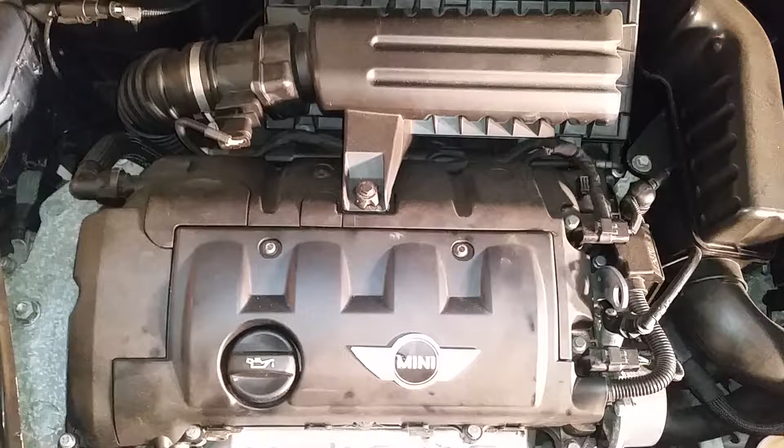Okay guys, I'm going to change the valve cover gasket. You watched my other video on when I was changing the spark plug. I actually found oil in the spark plug well, so that tells me I got a leaky valve cover gasket.

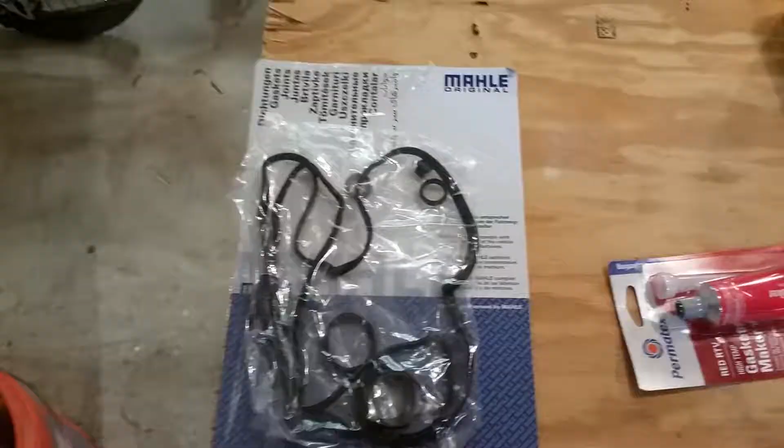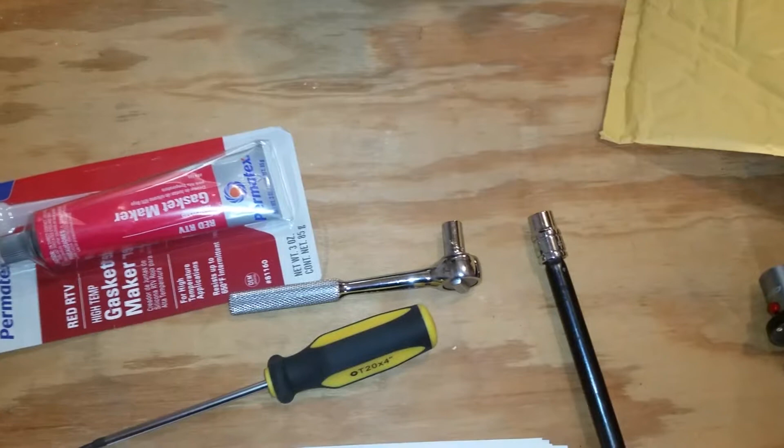So the tools I think I'm going to need, let me show you. I got a new valve cover gasket kit, it was a little over $20. I'm going to need some RTV, at least an 8mm socket and 10mm socket, a T20, and probably a few other things here and there - we'll see what we need.

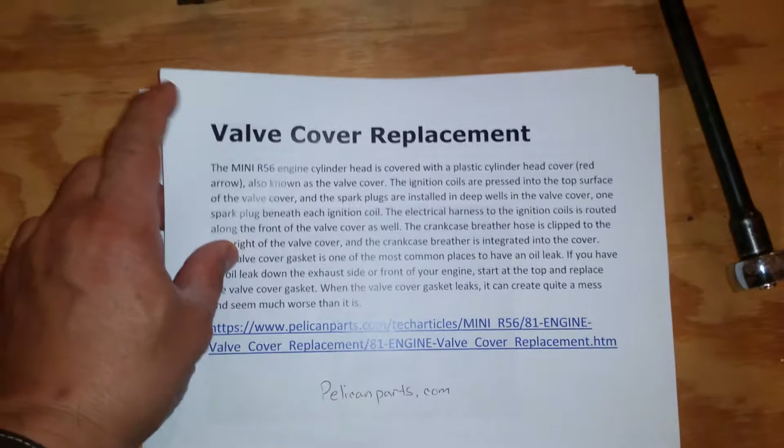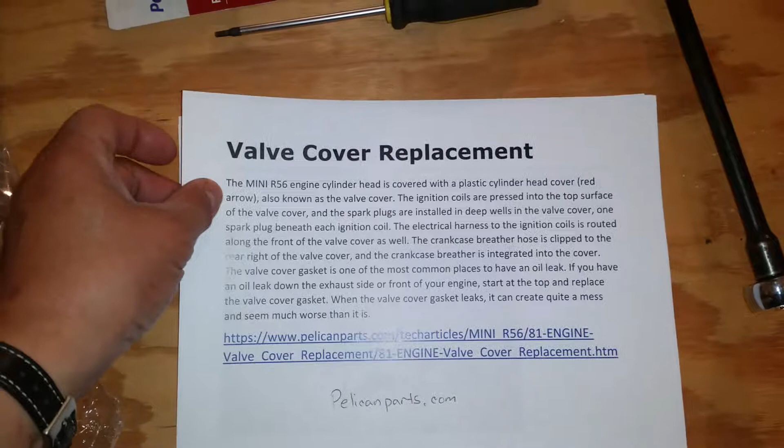I'm going to follow closely what I found online for Pelican Parts. Basically they had instructions on how to remove the valve cover off a Mini. I'm going to follow that, kind of, but I know theirs is a little bit different - some of the parts are a little different, so I'll point that out, but I'll try to follow through their steps basically.

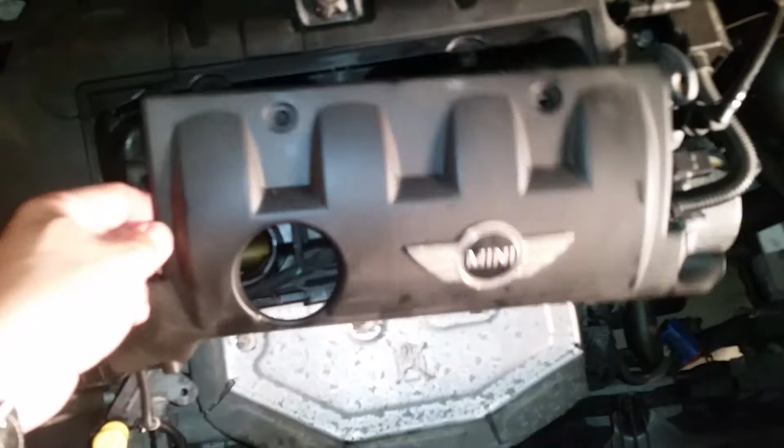So already I'm not following their instructions because mine's a little bit different. I went ahead and took the T20s out to take off the cover.

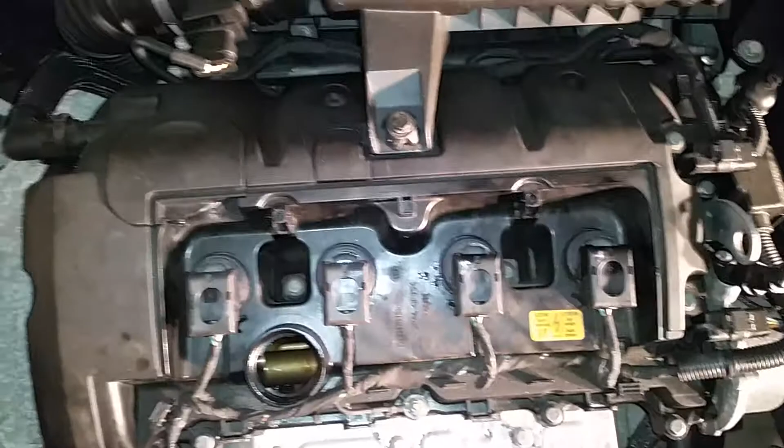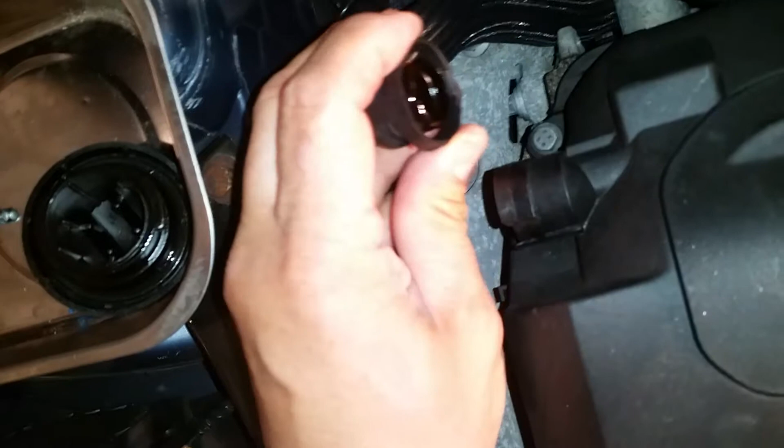So I think the next thing I'm supposed to do is squeeze this to slide off this breather hose. So basically to take off this breather hose, you just squeeze on both sides and then it pops right off.

Okay, most of the instructions are about getting this off, so we'll go ahead and take out this bolt first. Basically to be able to take this out, I've got to take this out. So I'm going to go ahead and loosen that bolt and disconnect it here.

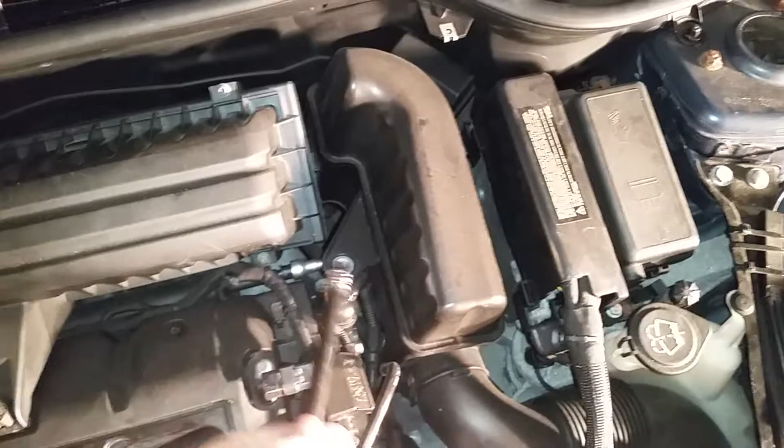So basically I pulled out this fresh air intake hose, and to disconnect it from this, you just push on this tab, which lifts it up and allows you to pull it out because of this little ridge right here.

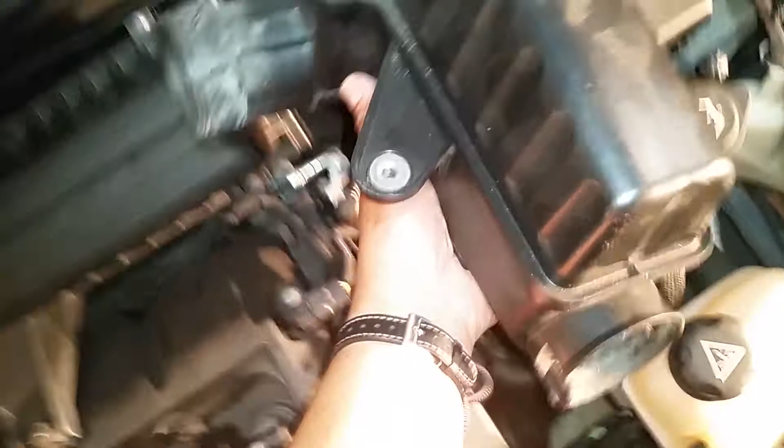So once that bolt was taken out and the fresh air hose was disconnected, this thing just pops right off really easily.

So took off this, I think it's a mass airflow sensor, and basically you push on this little tab that's on the bottom side. Once you push it and squeeze it, then it'll just pull right out.

So next I'm going to loosen this so I could disconnect it. I don't think you need to actually pull this off, because I'm going to try to work around it - you can see way down there, I think it's held in from that. So I think I'll still be able to get the valve cover off with it loose like that.

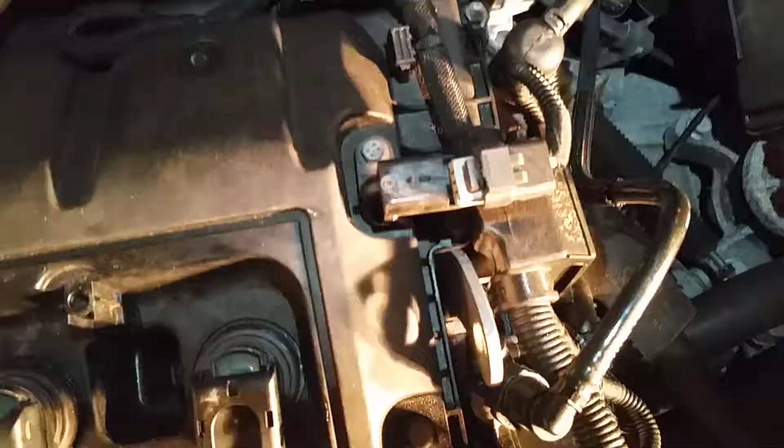Okay, took off the two cam speed sensors. Basically you lift up this top tab, lift it up, slide it out. Same thing with this one, lift it up and slide it out. Ooh wee, that was a bitch.

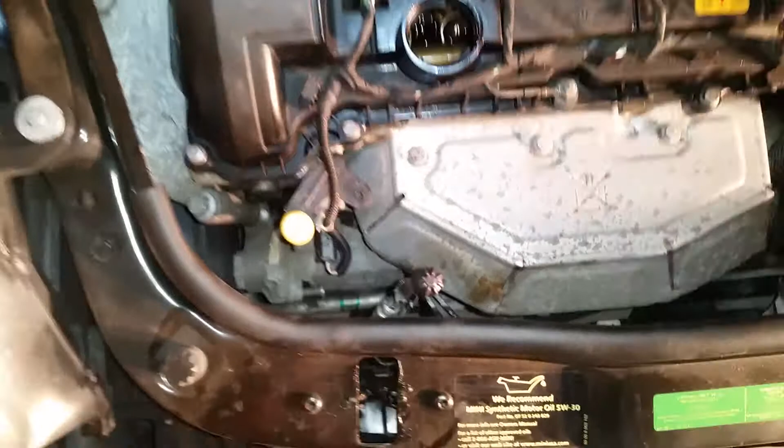Basically I took off all the wire harness off the valve cover, and I have 1, 2, 3 - and these are horrible to get off from the back - 4, 5, 6. So I have 6 of them.

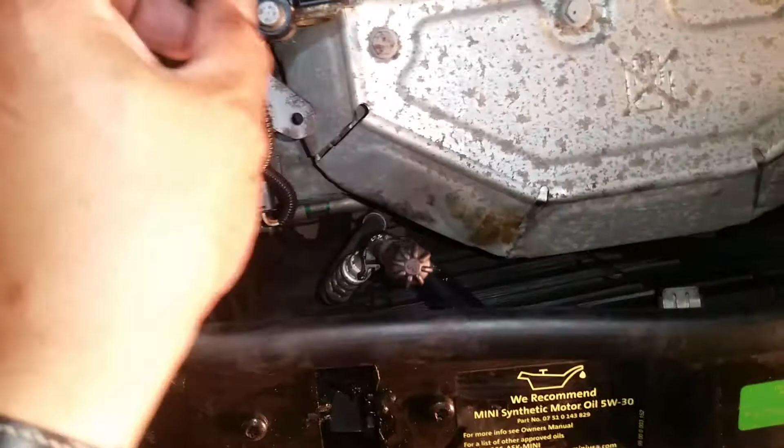Basically they're plastic with a metal clip with teeth on it, and what I use is a small screwdriver and get it underneath. You have to make sure you get it underneath the metal clip and the tab, and then just pry it up and work your way, maybe both sides or just one side, and keep working at it until they pop off. So that's 6 of those clips off the valve cover.

Okay, I remember it wanted me to take off this vacuum hose, and basically to take that off you just push this button in here and it'll pop right off. Now I think you have to take that off because you have to unlatch this harness off the bracket, and this hose is in the way, so you can't lift it up unless you take this vacuum hose off.

And there it is, right down there. So basically you lift this up and it comes right off this bracket right down in here. So that way you can get it out of the way.

There's one of the cam sensors off. Basically you use your 8mm and just take off the bolt and it'll pop straight out.

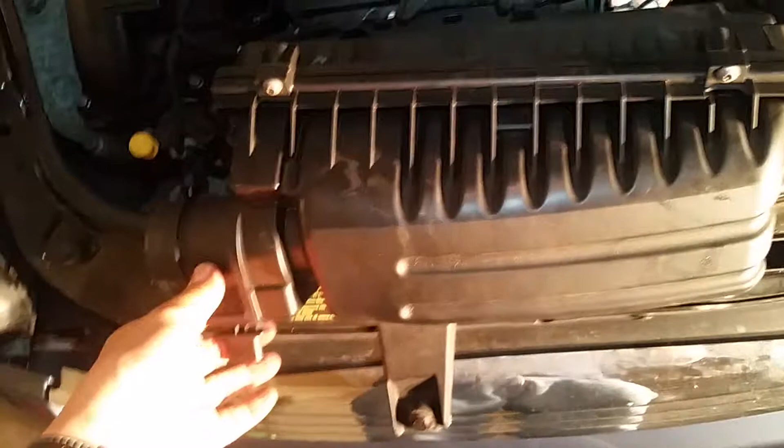So I got really curious on why this wouldn't come out, the air filter housing. Basically it's easy to take out. What it is, you got these plastic things with a little side ridge on it. It's narrow in the middle, has a little neck down here, flares up bigger on top. Same on this one, skinny, flares on top. Basically what it is, you got these rubber pieces to help keep vibration down, and when you put them back on, it'll just push through that hole and pop out on the other side, and that's what holds it in. So I got this off.

Okay, so now I think I'm clear of everything. I just need to take out this 8mm, which is connected at this ground. Then I can go ahead and take out the bolts all the way around the side.

And this is kind of different than that Pelican Parts instruction. It just said go ahead and take them off, and when you put them back on, you do a kind of crisscross pattern. But I was looking at my other manual, which I'll show you. I went ahead and got this because it's a lot cheaper than the actual mini manual, and online reviews say it usually has all the stuff you need anyways.

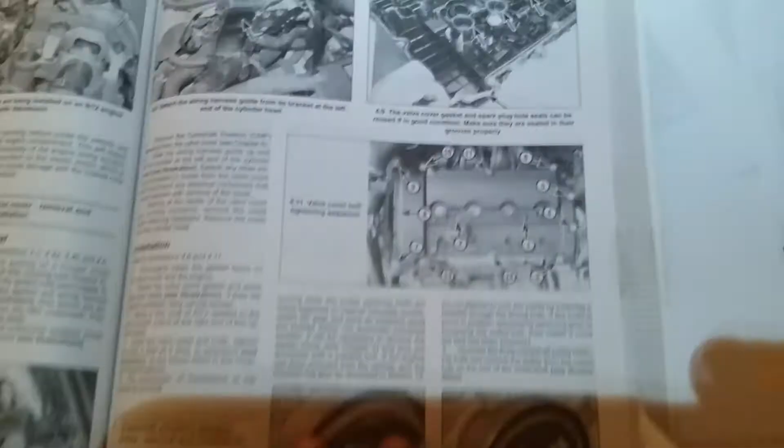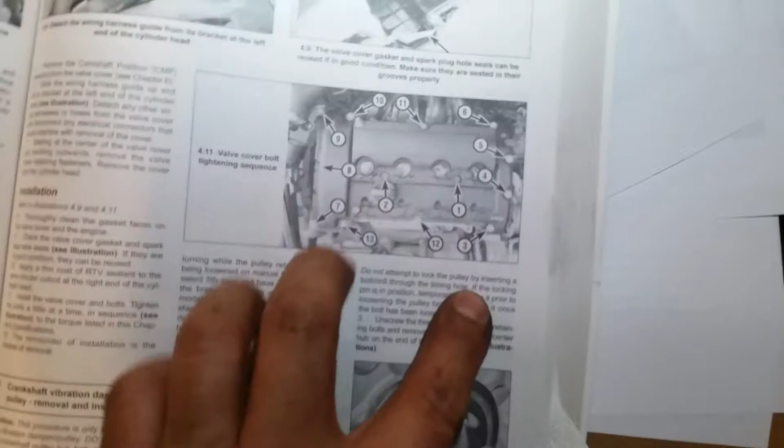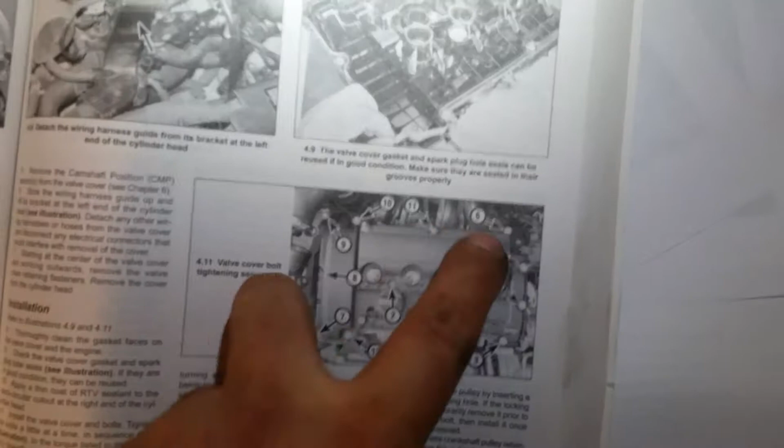So what's interesting is this is the pattern that you're supposed to tighten them and take them off: 1, 2, then you got 3, 4, 5 on the right side, then 6 up here, then 7, 8, 9, then 10, 11, and 12, 13. And basically when you put it back on, you go around in that same pattern to tighten it too.

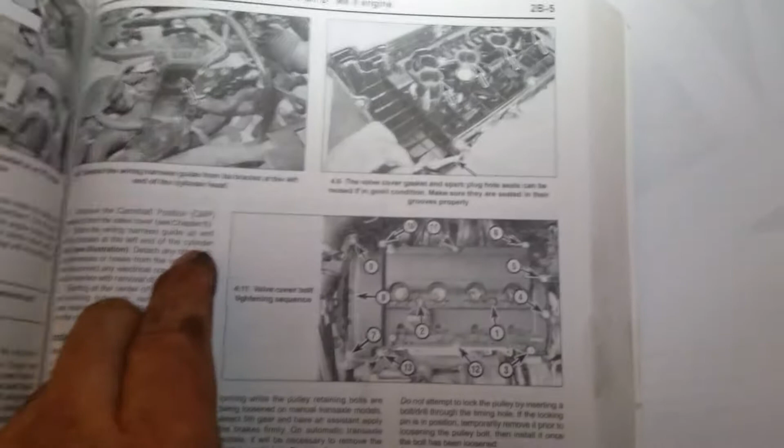So let's go ahead, take the bolts off and remove the valve cover.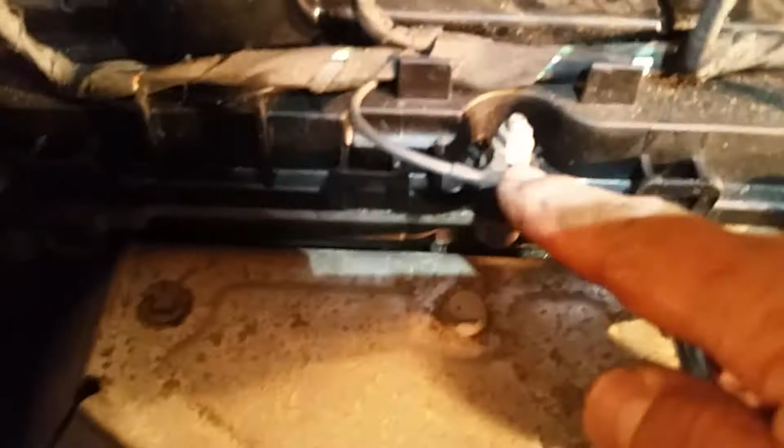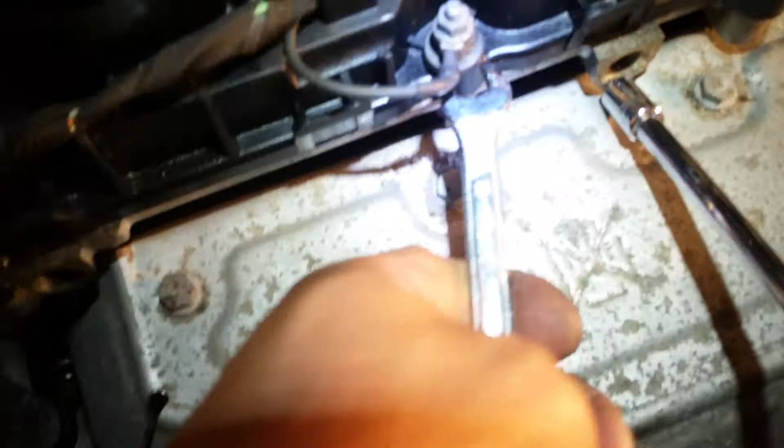So I was trying to take off this 8mm. Can you see what's happening? Basically the stud on the bottom is spinning with the nut on top. So basically you're gonna need a 10mm like this, and hold the bottom, then use the 8 on top, and it should come right off.

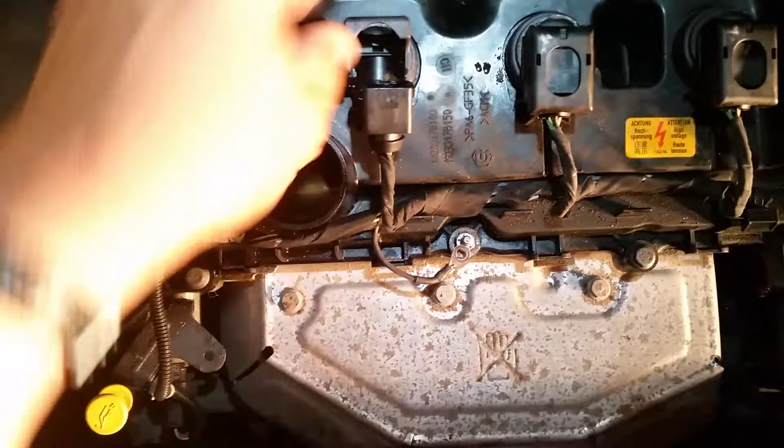Oh, before I take off all these bolts, I'm gonna go ahead and pop these off. Basically lift them up, disconnect, lift up, disconnect, and these would pull - the ignition coil should pull right out.

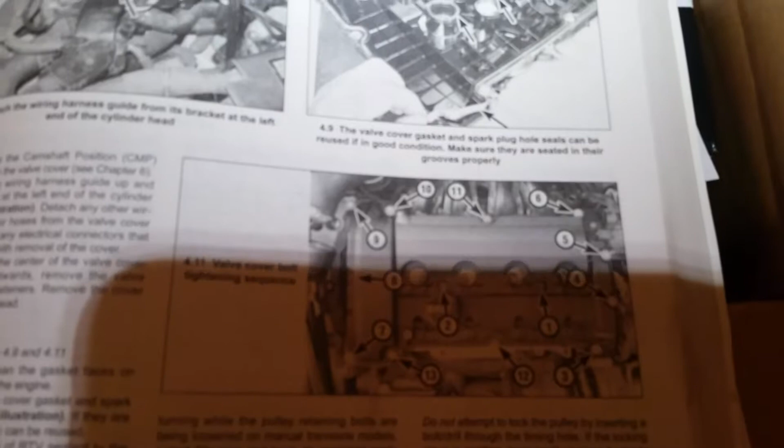So this book shows 13 bolts, but mine only has 12, so slightly different variation to what's in the book. We got 1, 2, 3, 4, 5, 6, 7, 8, 9, 10, 11, 12. Mine only has 12. Ah, this is the 13th right here - this stud actually comes off. Here's the 13th, and it's ground too.

So now I can pull the harness away and lift up the valve cover, hopefully. Okay, that was a little sticky, trying to peel it off. So I just used this and pried it on this part right here. And once the seal was broken, it was easy to lift it off a little bit. So it should pop right off now. Okay, there it is. Peel it off.

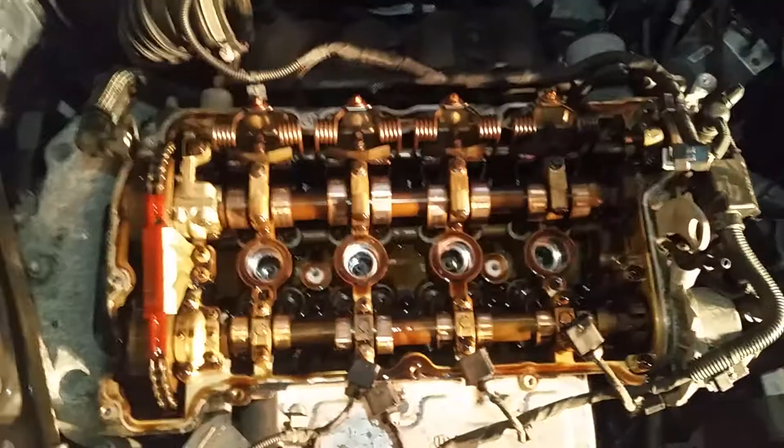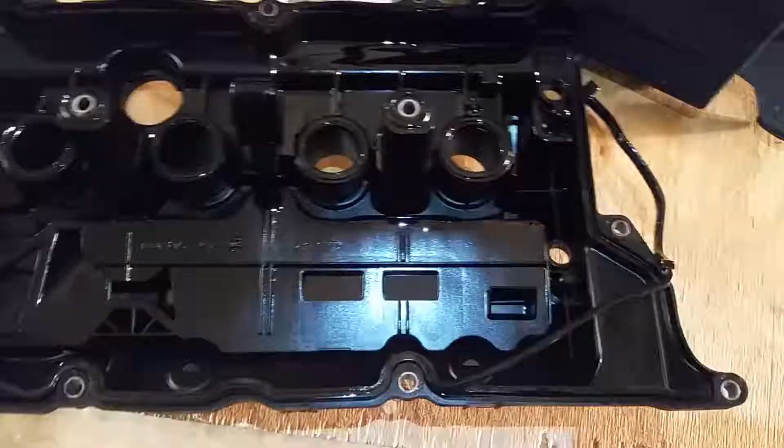They say go ahead and clean around where the gasket goes, use a little plastic scraper if you need to, clean that off. The valve cover - actually the gasket was sticking to the head, so when you peeled it off, it actually pulled it out some. So I got that. Got to change out these, and I believe these right here, and that's what the kit gives you. Okay, I wiped off the oil, but I still needed to scrape off all this black stuff around the edges. And during installation, you'll see they tell you to put some RTV here, and that's what's right here is the old RTV, which I gotta scrape off. Got the same on this side here, got the RTV, so I gotta scrape that off too.

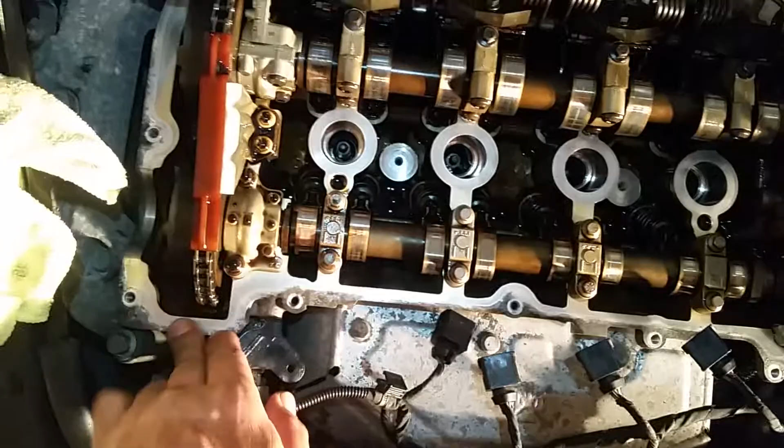Okay, that's pretty good. You're never gonna get this completely clean, but as long as it feels smooth, not like big chunks hanging there. The important thing is I got the RTV out of here and out of here. Don't forget to clean this, clean this, clean this, and wipe down this and this. When you're scraping off all that gunk, remember to wipe it away from the interior of the engine, so the gunk doesn't fall inside.

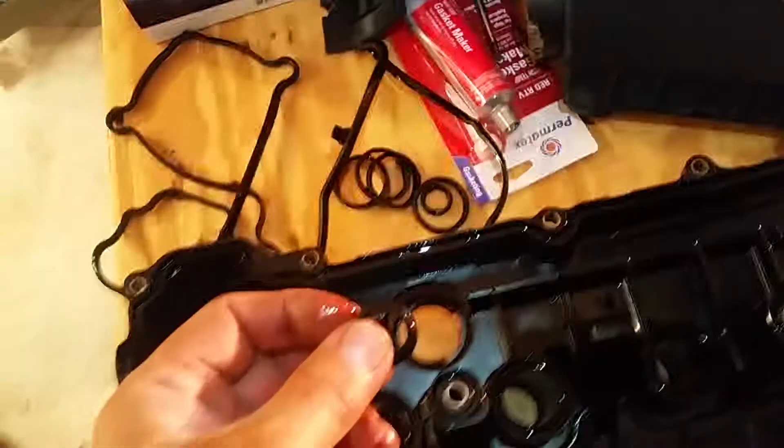So let's work on the valve cover. Okay, I went ahead and pulled these out, the two small ones from here, and the spark plug well seals for those, and took out the whole gasket wrap. I can feel that these have no squish to them at all, they're as hard as a rock, so that's why it's probably leaking.

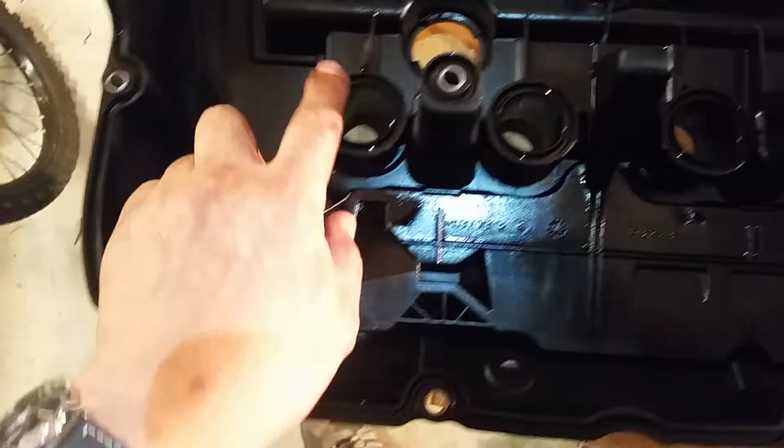Okay, I did a courtesy wipe around the flat surfaces. Basically that's just in case there's any gunk on there, it doesn't interfere with the seal. So I basically just went ahead and wiped around the edges.

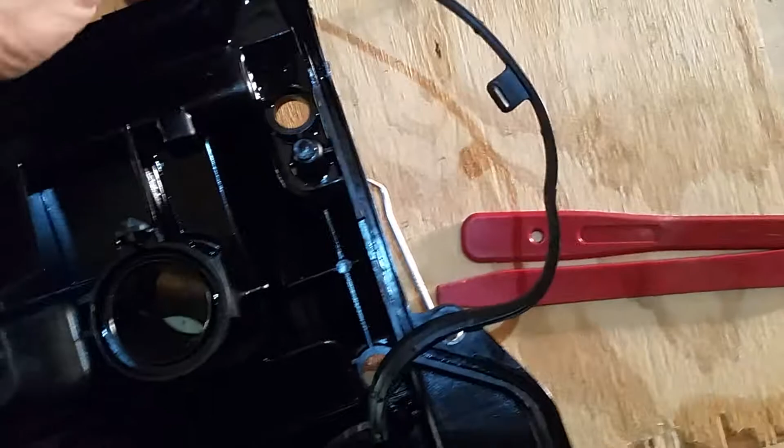So what comes in handy is to go ahead and take the old one, since it's already formed to it, and lay it out. You can see you've got this hump here, which is supposed to go with this hump here, and you've got this key, which is supposed to go with this key right here. So basically you lay yours the same way, and it might be inside out - mine I had to flip around because the key was on the wrong side, so you just turn it inside out and it should match.

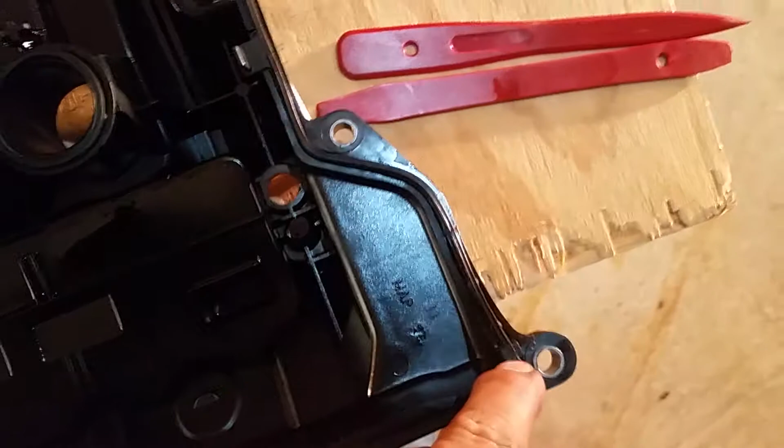Okay, there it is with the new gaskets in. There's a key here to make sure it's seated, a key right here, this cutout groove, and the key kind of keyed there a little bit. So that's how you know it's all nice and seated.

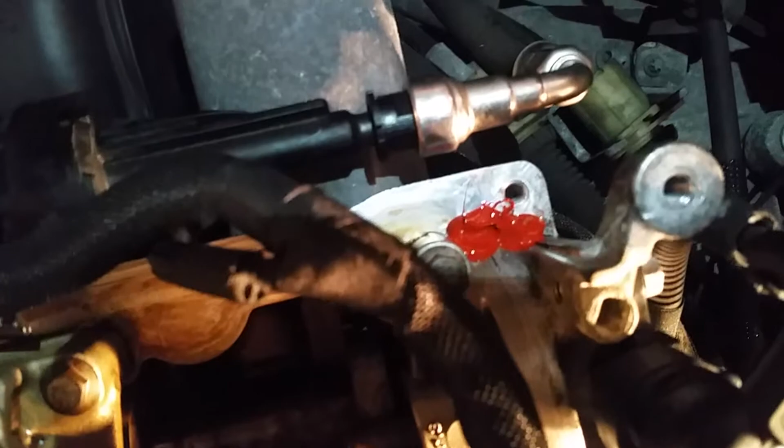Now let's put some RTV on the back, on the other end. What was on there was black RTV, but I'm using this high temperature RTV, just thinking it might work better. So probably put too much, but there's a glob there, and there's a glob there, and that's basically to get that little 90-degree crack in there, so it doesn't leak through that.

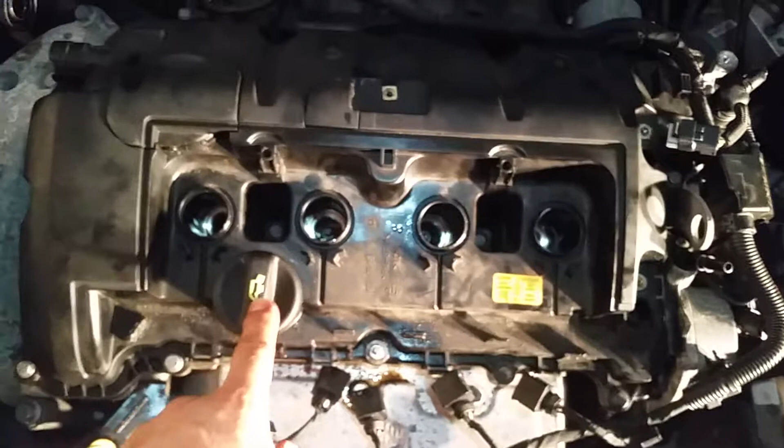Okay, I got all 13 bolts hand tightened back in, so just need to torque them down in the pattern that's in that book. You'll notice I had the cap on here when I was doing that, and then I actually dropped a bolt down into the engine while I was doing that.

Just make sure when you put this back on that the seal, the gasket, is still seated well. Just look around the edges, make sure it's not popping out. It'll look like it's raised up high - that's because it's not torqued down yet and compressed.

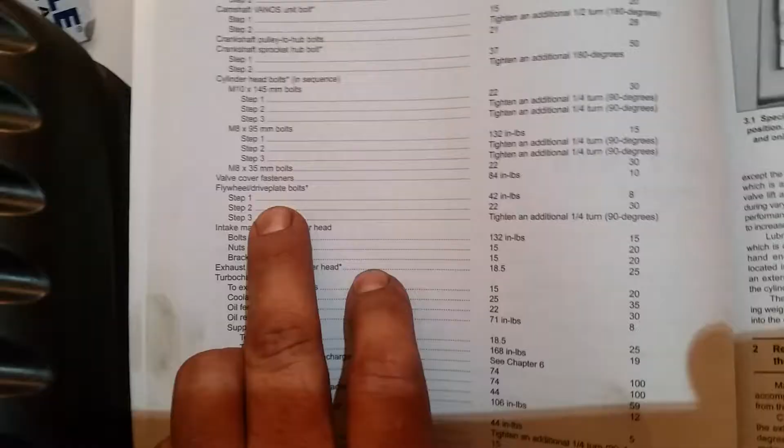So let's look in the book to see what the torque specs are. Okay, this is for our Mark II engine, and valve cover fasteners is 84 inch-pounds or 10 Newton meters, so it really doesn't take much.

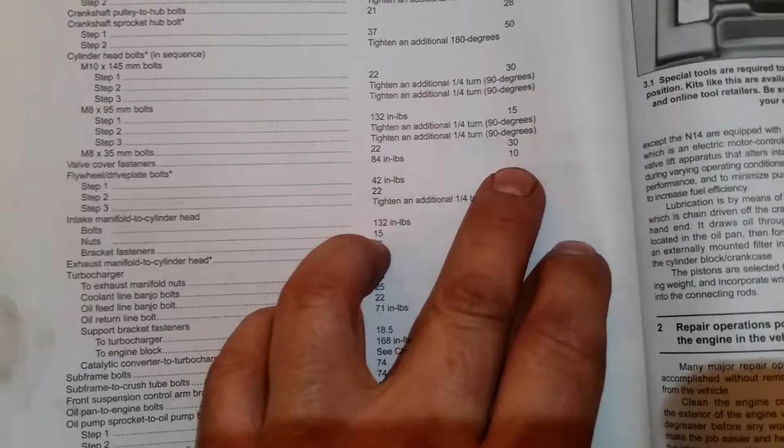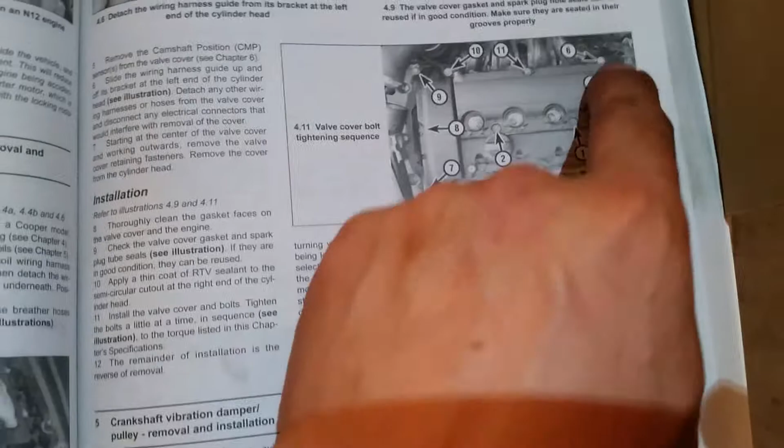So I'll go ahead and set the torque and go through that pattern at 5, and then do it again at 10. If you didn't see the pattern, let me find it again. Hold on, there we go. So I do 1, 2, 3, 4, 5, 6, 7, 8, 9, 10, 11, 12, 13.

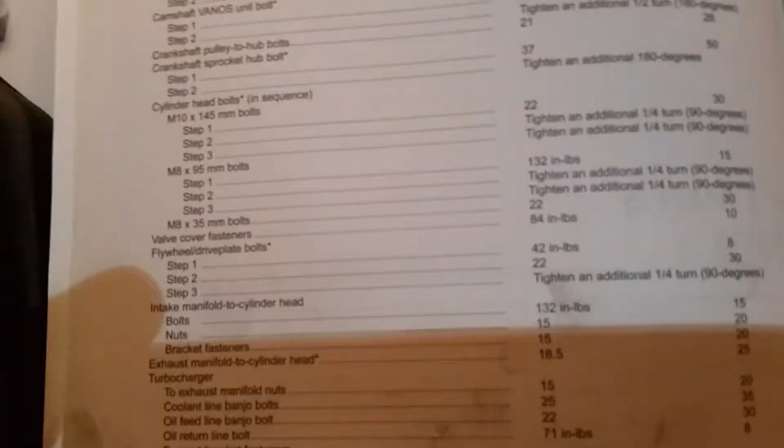Okay, they're all tightened to 10 Newton meters. I kind of had a brain freeze there and thought it was more than 10 Newton meters. I knew something was wrong because they were getting tighter, and I don't remember them being that tight when I was taking them off. So I went back and checked the book - okay, valve cover fasteners, 10 Newton meters. So don't over tighten them.

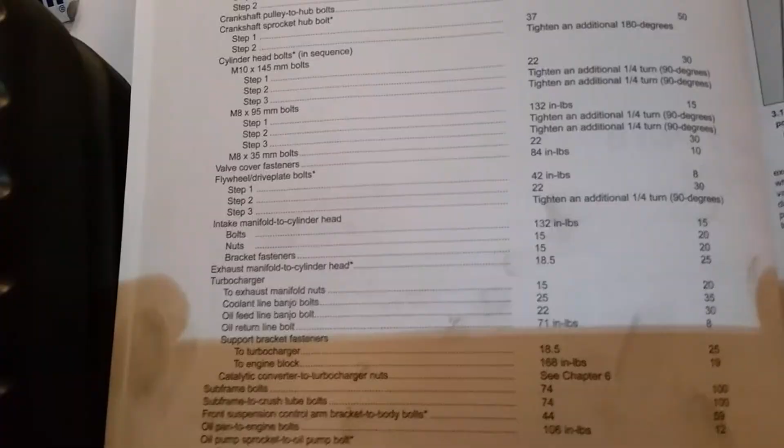I picked up some of this heat-proof cloth tape, and basically I'm gonna wrap these ignition wires a little bit more. More is better.

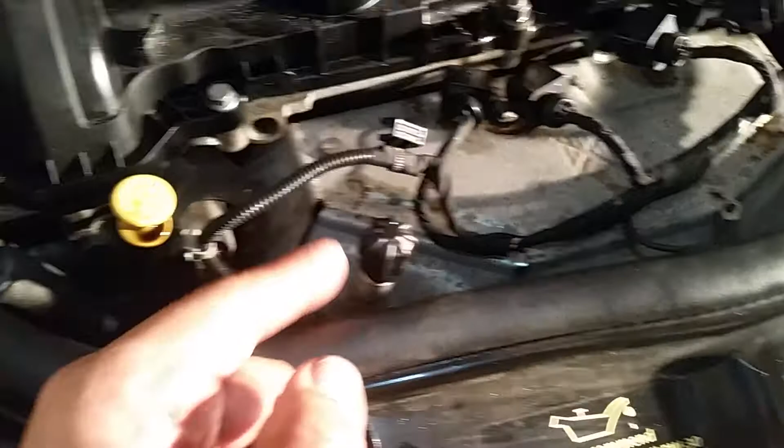Okay, here's what it looks like. I put more wrap on here, so all the little wire pieces that were exposed are now covered up. Little zip ties will keep it from unraveling. So let's put the engine back together.

I went ahead and put all the wire clips back in, front, side, and in the back.

Tying the ground back down, make sure you hold this so when you use the 8mm socket you don't end up spinning it on the bottom and making it tighter than it's supposed to be.

Okay, I went ahead and put the air filter back in. Basically it just pops into those grommets in the back. Tying this down, connect the mass airflow sensor back, tying the intake back hose, and I'm going to pop back on the breather.

Make sure you go ahead and slide this back onto its bracket. Then that allows you to go ahead and connect this vacuum hose back up.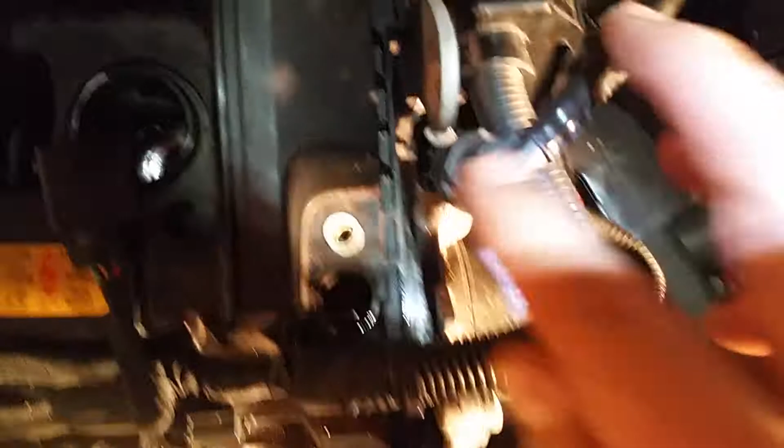Which is right there. They recommend in that book to replace this O-ring when you pull them out. Don't use the O-ring again, but the kit didn't come with it, so I'm going to have to buy some O-rings separately and replace these at a later time.

So go ahead and, camshaft sensors, go ahead and pop those back in, screw them down, and connect the connectors. Basically when you put this back in, put it in at a little bit of an angle like that, push it in, then turn it.

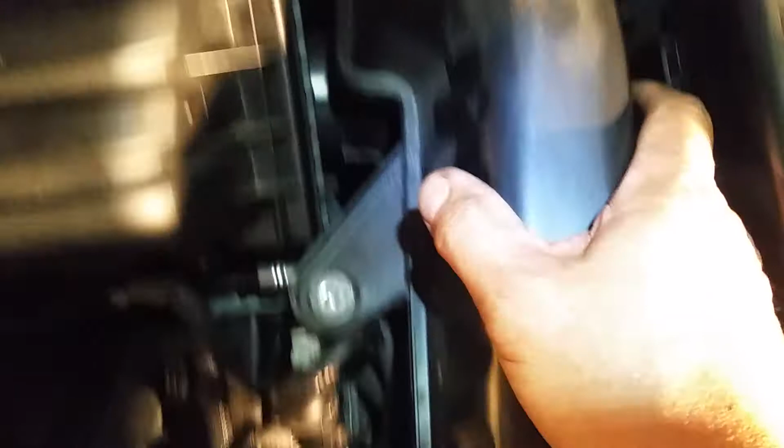It actually locks into place back there because there are tabs on it. So you can tell you're actually in by pulling on it and it doesn't pop out. You go ahead and put the bolt back in here.

Fresh air intake, go ahead and route it, snap it back in, and make sure both ends are snapped in.

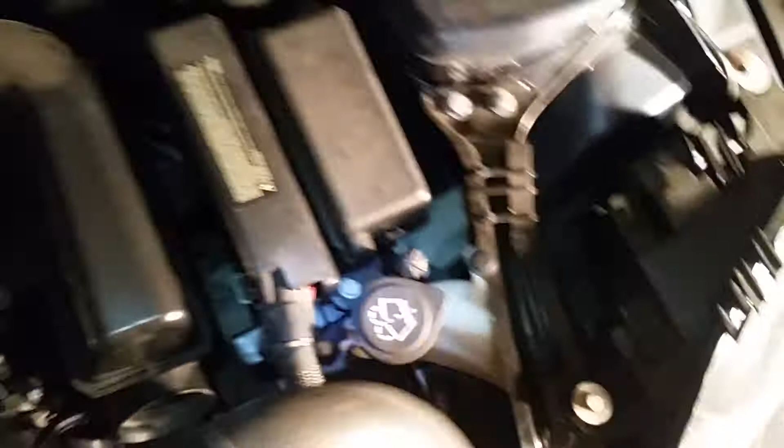You know what I think? This fresh air intake was never connected to this trim up here. It was a bitch getting it back in.

So basically there are ridge tabs. Let's see if I can get a light on it. There are ridge tabs right here, and there's another one on this side right here.

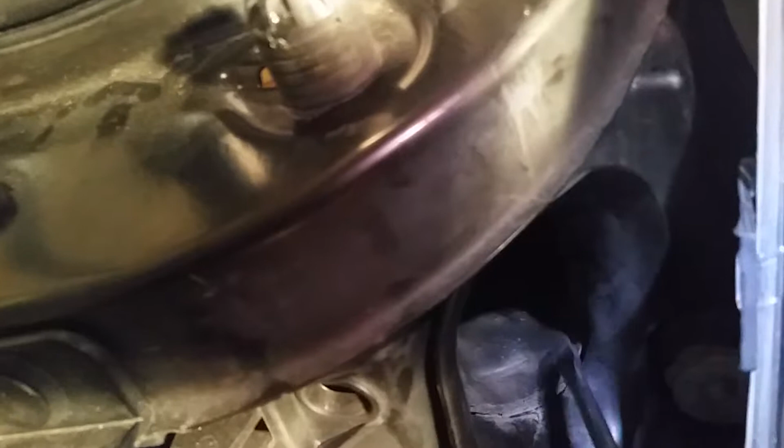So basically you get a screwdriver underneath and lift it up, get it over that little hump, and then it'll fall into the little groove. So now it's actually connected. These are the old ignition coils.

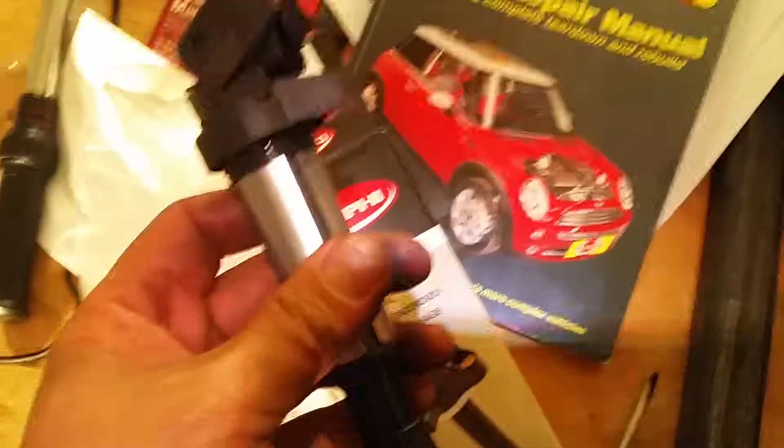I went ahead and bought some new ones because the old ones had oil on them. I read somewhere that it's a good idea to replace them. So these are off-brand. Here's the off-brand one, they're about a little over 20 bucks a piece.

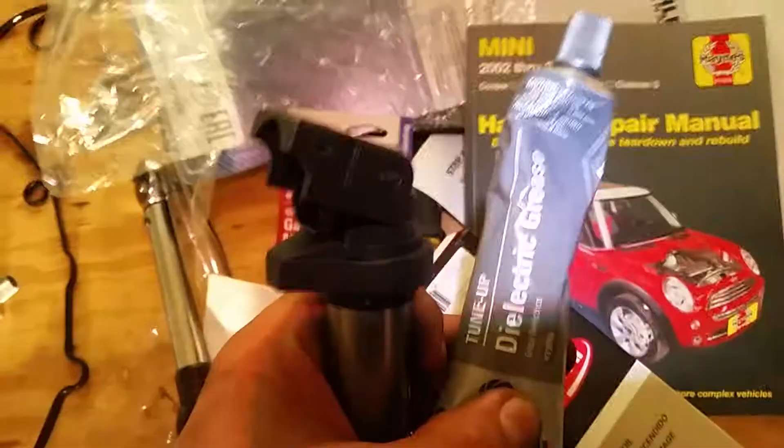Go put some dielectric grease underneath here and in the boot. So this is dielectric grease, meaning non-conductive. I'm going to put some on underneath this boot to make it easier to take out next time, and a little bit on this boot here at the bottom for all four.

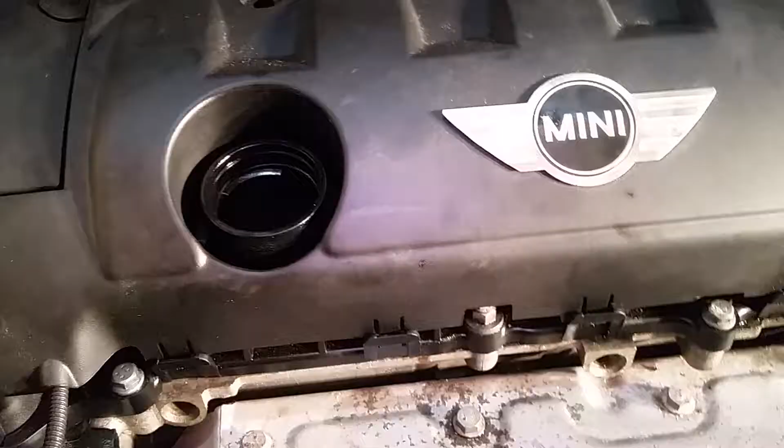Okay, one thing I didn't mention, I discovered when you put this ground back on, make sure it's aligned and not sticking out past the tab, because otherwise you will not be able to get this cover on.

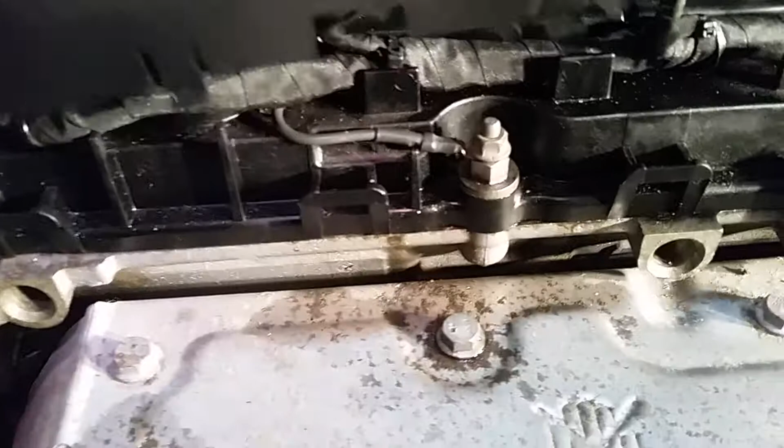Make sure you hold down the other one with a 10mm, and go ahead and take off the top with an 8mm. You could, if you need to, pivot it back so it's tight up against the valve cover. So let's put the top back on and start up the engine.

So we're going to go ahead and start up the car, and everything's back together and buttoned up, and I still love my mini courtesy light. I did a video on how to change that out if you want your courtesy light to have the mini logo. So let's see how we do here.